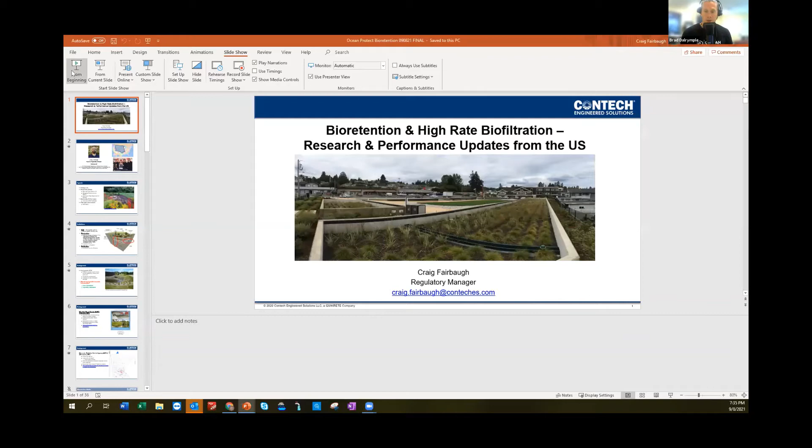And look, again, for those who aren't familiar with Craig, Craig's from Contech Engineered Solutions, and he's based in Oregon in the USA, and he's done a lot of work in relation to bioretention systems in the States. And without further ado, Craig's going to give a presentation.

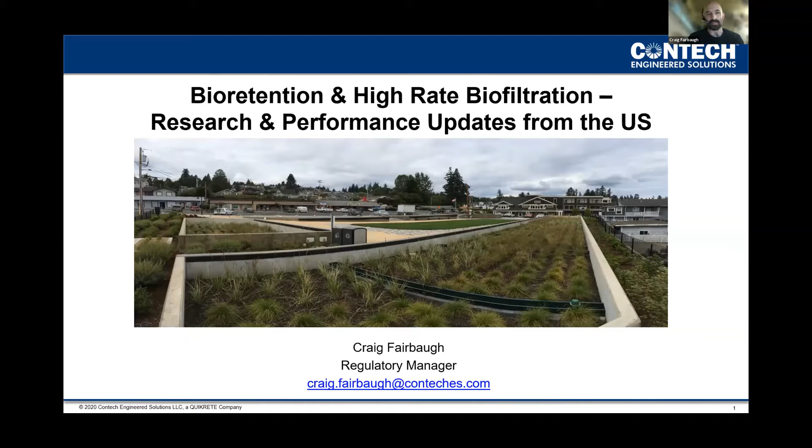And as Brad mentioned, my name is Craig Fairbaugh. I'm a regional regulatory manager for Contech. Before I was a regulatory manager, I was actually a design engineer for about 6 or 7 years, designing stormwater treatment systems in over 35 states across the United States. I've got a bachelor's in environmental engineering from Portland State, currently wrapping up a master's in environmental and water resources engineering. And surprise, my research interest is in stormwater quality, and particularly synthetic runoff and long-term performance and maintenance demands of stormwater control measures, or SUDs, as I know that you guys refer to them.

As a regulatory manager, I cover, as Brad mentioned, about 12 states in the middle of the country, primarily working with city and state agencies on stormwater manuals, updating standards. Obviously, we do manufacture stormwater treatment devices, so to make sure that those are accepted, and to walk through all the technical jargon and make sure that the highest standards for stormwater treatment are being used in those areas.

And also, as Brad let the cat out of the bag, I have been to Australia a few times in a former life. I played music for 10 years. And I just really love Australia. Been there, I think 3-4 times. It's hard to remember, but thought I'd include a shot here for fun. Actually had the chance to play the MTV Video Music Awards, I think it was, in 2008, with this band right here, Juliette and the Licks. That's me, second from the left, with a heck of a lot more hair on top of my head and a lot less hair on my face.

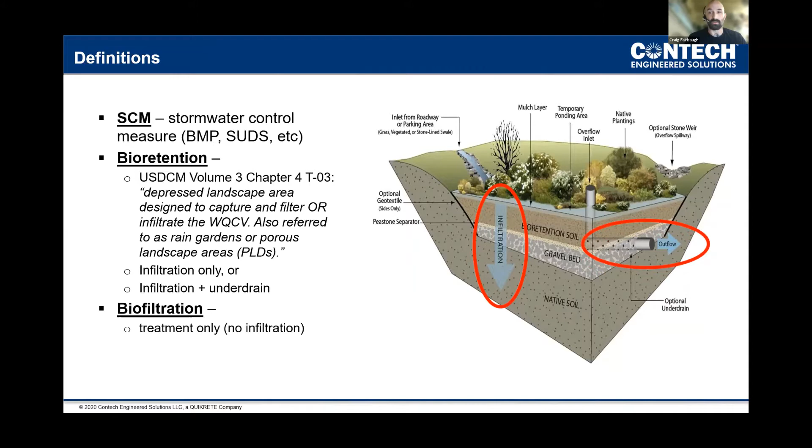And so why all this focus on bioretention? It really is the most common and popular stormwater control measure due to the many benefits achieved when it's designed properly. Pollutant removal, rate and volume control, aesthetic benefits with plants, trees, and vegetation. And it can also benefit local ecology by creating habitat for pollinators and other species, and can even mitigate the heat island effect in dense urban environments.

So it's really easy to see why bioretention is so popular. It has so many different benefits. It's difficult to wrap all those benefits into one treatment system. And they've been around for a long time, I think over 20 years at this point. However, after 20 years of implementation, we're still seeing a lot of failures of these systems in the United States.

And I don't know what the cause of this particular failure was, but there really are multiple failure modes that can occur when designing and constructing bioretention. And even just sourcing the media, storing it, blending it, there's several points of failure that can really affect your water quality outcomes. And really what an engineer has designed on paper is not always constructed to specification on the site.

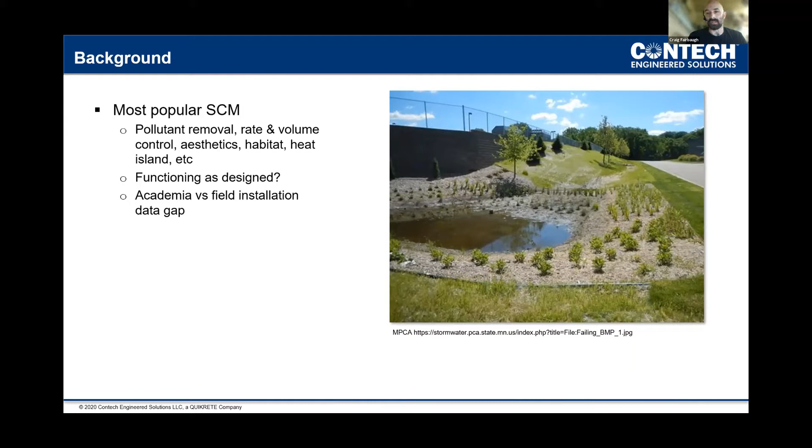So really the central theme of this presentation and from my perspective for bioretention currently is how do we best translate all the great research we have into practice? We have 20 years of research on these systems and we're still seeing so many failures. Why is this happening? And from my perspective, there's really a two-pronged solution here. First, we need to have a thorough and adequate media specification. Without the correct recipe, we're just not going to achieve our desired water quality and design outcomes. You've got to start off with the correct recipe and the correct spec. Otherwise, there's a lot of failure modes and high likelihood of not achieving water quality outcomes.

And you can't just have that recipe and that specification alone for the media and the system. There also has to be a regulatory enforcement mechanism there. If a proper specification isn't required, unfortunately, folks aren't just going to spend time and resources and money on SCMs and SuDS out of the kindness of their own hearts. I wish they would. I certainly would. If I had a ton of money, I would put treatment systems everywhere.

But there needs to be some sort of regulatory requirement and adequate oversight in the form of either a plan check review or as-built inspections. There has to be some regulatory enforcement to get these specs actually used in the field and in practice.

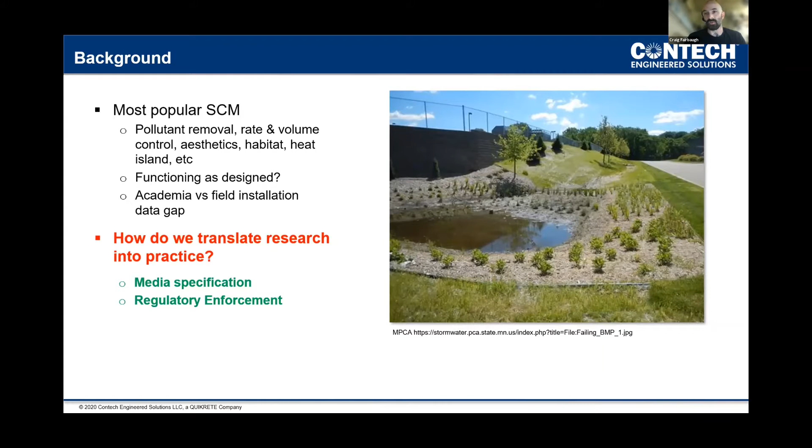So a little bit about the sources in this presentation. The Mile High Flood District in Colorado is a renowned agency in the US. The Colorado River alone is responsible for providing drinking water to 40 million people. And the district is currently updating their stormwater criteria manual. I'm a stakeholder in that group that's updating the manual. And as such, they've compiled a bioretention media literature review to kind of update their current spec.

And so a lot of the content in the next slides, I'm really just summarizing some of the content there. It's a really great lit review of all the best practices that are out there and was put together by one of the leading water resources consulting agencies in the US, Geosyntec Consultants. So big thanks to Geosyntec for the great work and lit review. I'm really, in these next slides, just a messenger here, bringing you all the highlights of all the fantastic research that was done and their lit review that they put together.

I'll also be peppering in some of the lit review with guidance from the Minnesota Pollution Control Agency. MPCA has an online stormwater manual with a similarly thorough lit review of bioretention best practices. And the manual is online, which is a really novel concept. So MPCA can update it in real time whenever new research or best practices are available. Typically, if the manual isn't online, you're waiting 4, 5, 6 years, sometimes longer, for stormwater manuals to be updated. And so a lot of the design information can really be outdated.

So can't say enough about this manual, and having it online. As soon as any new research comes out, any best practices, they can update it right away. I use it as a resource for cities and agencies I work with in the United States whenever possible. It's just a fantastic and thorough guide.

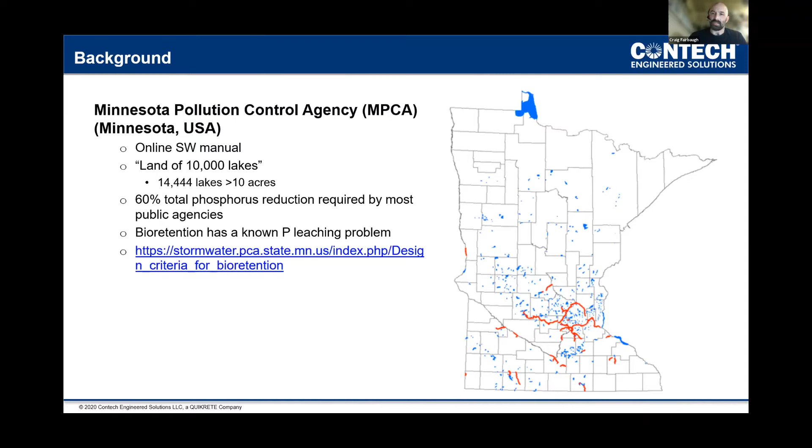And as we'll see in the slides throughout this presentation, bioretention in the United States really has a known phosphorus leaching problem. And I imagine that's a problem in most jurisdictions around the world, really, if they're all following kind of the same dated specifications. And I bring this up because Minnesota has such a keen eye on phosphorus removal. They're really looking at bioretention media closely because they want to protect their receiving waters from nutrients. And as such, most of the agencies do require 60% removal of total phosphorus, which is a pretty high bar. Washington State Department of Ecology verifies manufactured treatment systems at 50%, so this is just a little bit higher, trying to remove 60% total phosphorus on all stormwater projects.

So the Mile High Lit Review, again, will kind of serve as our guide here through bioretention media topics. First, we'll look at gradation and particle size distribution of media. We'll look at organic matter content, homogeneity of bioretention media, hydraulic conductivity. We'll look at the loading rate, which can also be seen kind of as a surrogate to pollutant loading, and designing for maintenance. And we'll briefly look at recommended bioretention media depth.

And this is really a common theme I hope that you see as we go through these slides for bioretention, where there may be an advantage to adjusting one component or one variable of the system, one ingredient of the recipe, so to speak, but there's typically an effect on all the other components and ingredients. And there can be disadvantages to other components when you optimize some parts of it. And so this is really one reason why bioretention specifications are so difficult to get right. It's just a delicate balancing act of ingredients.

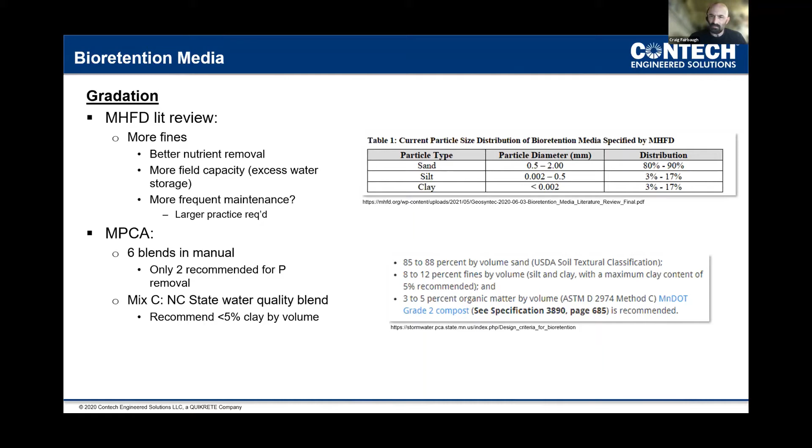Looking at organic matter, organic matter is really the critical component when we're thinking about nutrient removal and leaching potential. And a common blend used in the United States, really in a lot of jurisdictions that don't have thorough recipes for bioretention, is what's called the 60-40 blend. I don't know if you guys have something similar out there in Australia, but it's a really simple spec that's made up of 60% sand and 40% compost.

And that Minnesota Pollution Control Agency mix that they recommend if you do have phosphorus sensitive waters, mix C, recommends that to control nutrient leaching, organic matter should only be 3 to 5% by volume, which is obviously starkly different from 40% compost.

And the way that I like to explain this in presentations, the simplest way, is to think about a sponge and a tea bag. A tea bag leaches its contents downstream, whereas a sponge will retain any material trying to escape. So we definitely don't want to be tea bags with our bioretention systems, just washing out all this organic matter and nutrients downstream, which can be a big problem and has been a problem here in the United States.

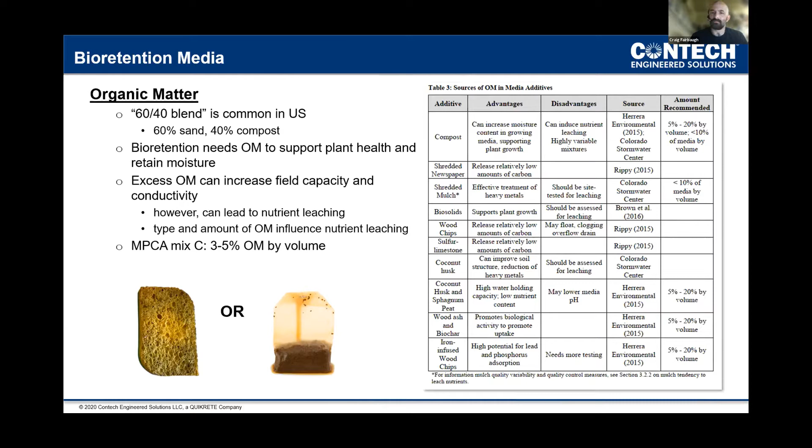The literature review research demonstrated layering different gradations can be beneficial to performance with specific respect to nutrient leaching. I hope you guys are seeing the pattern here, how much of a problem nutrient leaching is for bioretention media. The research has shown that layering a high conductivity media over a low conductivity media can help retain any leaching nutrients from organic matter.

Nutrients typically leach in the dissolved phase and require more contact time to sorb to active sites in the media. So research in the lit review has shown that choking off flow in a lower conductivity media at the bottom of bioretention is really effective in removing total phosphorus.

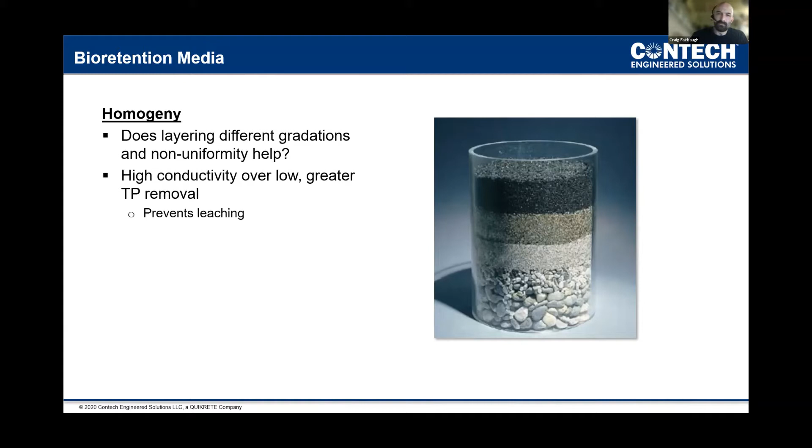Looking at hydraulic conductivity of media, this is arguably, from my perspective as a designer, one of the most important aspects of media specification. It's often used to size a practice. And it's not only the rate at which runoff can pass through the media, but also the rate at which pollutant removal has been demonstrated in research. So very important metric here.

In the US for public domain conventional systems, this is typically on the order of about 1 to 12 inches per hour, or approximately 25 to 300 millimeters per hour in metric units. And the lit review from Mile High Flood District notes that a media specification alone can't really determine the conductivity.

This really gets to the point that conductivity in real world storm events really fluctuates and is dynamic. There isn't just one conductivity that occurs through media. You have things like vegetation root growth affecting conductivity as the roots are growing and decaying. The media can be compacted during installation.

That can significantly affect conductivity, sometimes in a negative fashion. The system can also be partially clogged, which has reduced conductivity. It can be undersized. There's just really a lot of variables that can affect your hydraulic conductivity.

And research, no surprise here, the literature review showed an over 3.6 time decrease in conductivity over 1.5 years of the system being in the ground, which is really to be expected. And most jurisdictions do have safety factors to account for those decreases in conductivity. And this research in particular suggested applying a safety factor of 3 to 4 on the hydraulic conductivity to account for eventual clogging over time, which really results in a much larger footprint of the bioretention practice if you want to make sure that you're hitting your design hydraulic conductivity.

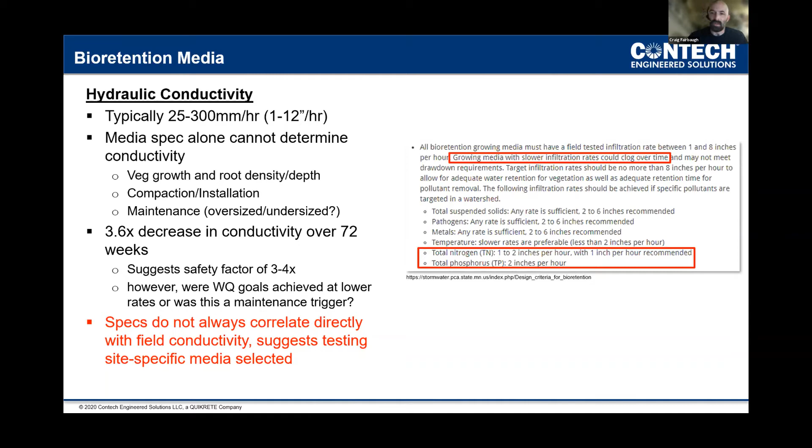And speaking again to the delicate balance of variables at play, on the right there is an excerpt from the MPCA manual, which suggests different conductivities required to remove different pollutants of concern. And note that the MPCA and research suggests media must flow at a really low conductivity, about 1 to 2 inches per hour, or approximately 25 to 50 millimeters per hour to remove nutrients. However, it's also interesting to note at the top there, highlighted, they have some guidance that says slower infiltration rates actually could clog over time. So just once again, I can't say this enough, it's a very delicate balance to remove nutrients and have a reasonable hydraulic conductivity so the system footprint is not overwhelmingly large.

Bioretention systems and all SCMs should ideally be sized using that hydraulic conductivity or an infiltration rate. Sometimes people call them different things; hydraulic loading rate we also use. But sometimes this isn't really known, again, because it's dynamic or perhaps there just isn't a design criteria provided for that by the local agency. And so in lieu of that, design manuals will recommend sizing a practice based on the size of the contributing drainage area. And Mile High Flood District recommends that bioretention footprints must be at least 2% of the impervious drainage area, which is fairly common in the United States.

But some agencies, like the Minnesota Pollution Control Agency, recommend that the footprint must be larger, or 5 to 10% of the contributing impervious drainage area. And this is presumably to be able to meet those phosphorus goals that they have in Minnesota, but also it's just a best practice that I think people are tuning into to minimize the amount of maintenance needed and really prevent the premature failure of these systems.

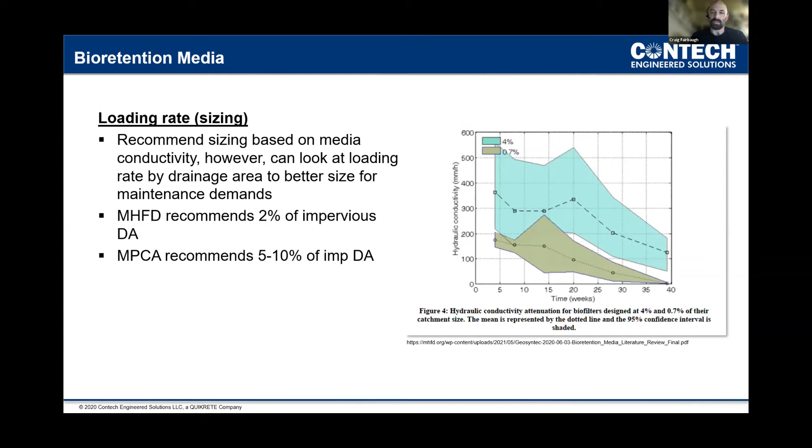And the lit review research did confirm some of this approach with field data, showing there on the right a system sized at 4% of the contributing drainage area in light blue. This had a much higher hydraulic conductivity. You see that decrease over time that we were speaking about. And then you can see the smaller size 0.7% system in green, which demonstrated a much lower conductivity.

And media depth is pretty uniform amongst most bioretention specs. It's usually around 18 to 36 inches. And the lit review did demonstrate that increased media bed depth can promote higher removal of dissolved constituents like phosphate and metals. Deeper media beds can also allow for more anoxic conditions, which can help promote removal of nitrogen and

denitrification. However, again, there's just really that delicate balance when you start to get into the world of trying to remove nitrogen in these systems and getting anoxic conditions in the very bottom. Anoxic conditions can also promote the release of captured particulate phosphorus into the dissolved phase. And so again, that nutrient leaching problem downstream. And so, it's a really delicate balance if you're trying to remove nitrogen and phosphorus in the same system.

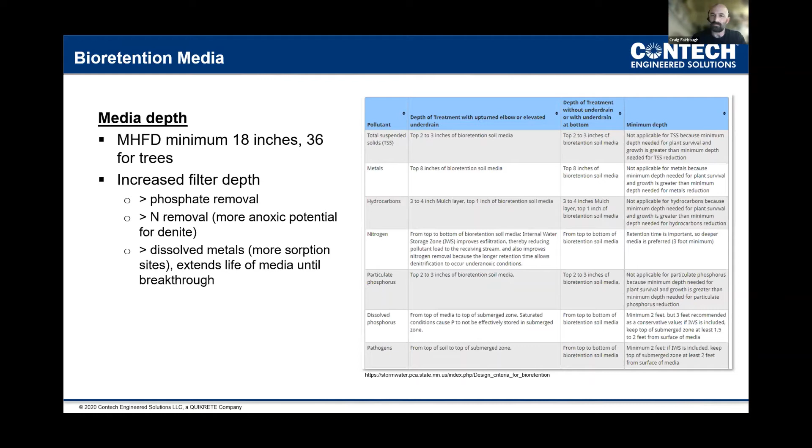Moving on from some of the media specs, the lit review did cover vegetation, and vegetation obviously plays a critical role in bioretention systems. This is pretty commonly known and well researched. And the research in the lit review demonstrated vegetation is critical to remove nitrogen and phosphate. And without vegetation, nutrients can be leached once again.

And vegetation does improve conductivity with the root growth and decay, creating macropores over time as the roots expand and die. And this phenomenon can also contribute to extending the life cycle of bioretention systems. In one research study, it showed extending the life by 3 to 6 years. And last point on vegetation, it can provide some volume reduction via plant transpiration. I don't know how significant that is compared to infiltration if you're infiltrating below the practice, but there is some volume reduction from plant transpiration.

But there's a trade-off there again. It might not be a good idea to jam pack your bioretention system with tons of vegetation. Some of the research might suggest that, hey, more plants, we're going to get better benefits. But if you're thinking, once again, about nutrients and nutrient pollution, if you have dead plant matter, maybe you have a deciduous plant in there that sheds its leaves, that can decay on top of the practice and send some nutrients downstream to pollute our receiving waters. So really, it is a delicate balancing act to get all these specifications correct.

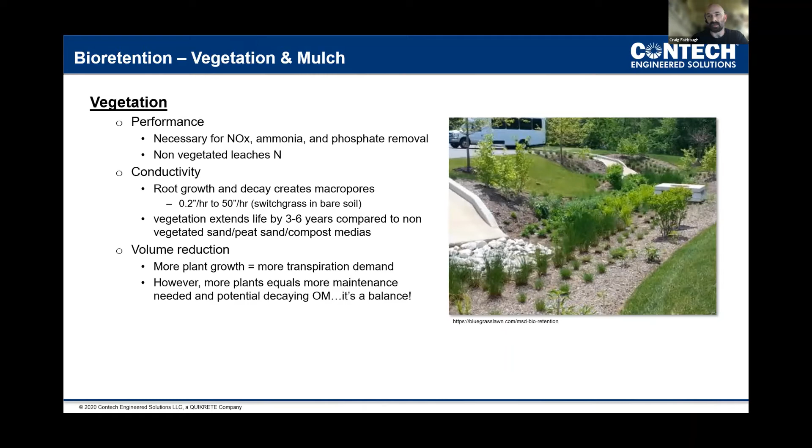And mulch is somewhat of an interesting topic. Some folks don't even use mulch in their bioretention systems. Many do. The literature review spoke to mulch removing hydrocarbons. It showed excellent removal for hydrocarbons and oils and grease. Again, nutrients popping up here again. There is the leaching potential for nutrients from the mulch even. And so the literature review recommended that your mulch, if you are using mulch on top of these practices, is free of soil, roots, plant clippings, and debris.

And some jurisdictions don't use mulch because they have floating concerns. During larger storm events and bypass, the mulch will actually float and go downstream, which is obviously not great, especially if there's pollutants that are caught in the mulch. And the literature review does discuss the benefits of different kinds of shredded mulch between single, double, or triple shredded. If you're interested in the mulch specification, I recommend taking a look at the literature review itself.

But they also do recommend some simple floatability tests for mulch if that is a concern. They recommend a really simple test that anybody can do. Put your mulch in a bucket, stir it up, let it sit for 24 hours and see if it floats. Pretty self-explanatory, easy DIY check there.

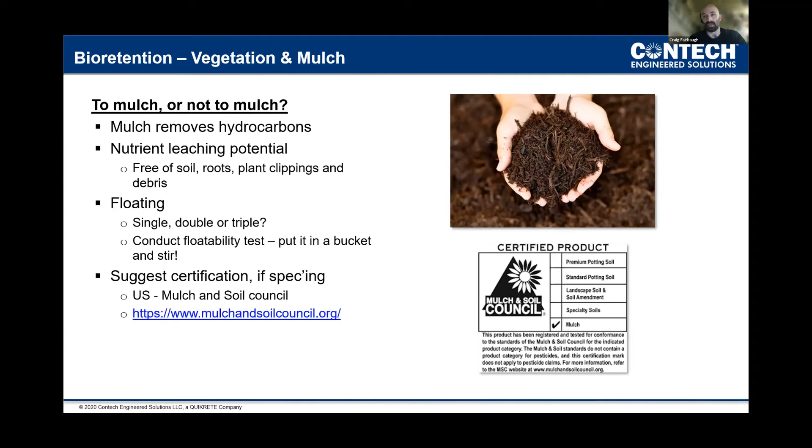But if folks are using mulch in these systems, I would strongly suggest having some sort of certification if that exists. I know that here in the States, we're fortunate enough to have the Mulch and Soil Council, which does kind of a baseline toxicity test for mulch and makes sure that everything that they supply meets that leaching and toxicity test. There's a link there if you want to learn a little bit more about the Mulch and Soil Council, but that's really helpful to at least have a baseline that the mulch has been verified.

And they've been pretty successful. There's a lot of great data on this. But again, using this in bioretention media, you've got to pay attention to that balancing act. And while it might be great for removing nutrients, if you have too much iron or alumina in the system, it can actually do too good of a job and take up too much phosphorus and not be bioavailable for the plant. And you can have plants die because of it. If you just think that, hey, iron and alumina are great for removing nutrients, let's put a ton in, it can actually kind of backfire on you and kill the plants.

And I don't know if this is a really hot topic in Australia, but I know that biochar, at least for the past 5 or so years, has been a really hot topic at conferences and amongst researchers. And there's a lot of promising research and lab scale data, even some field data out there that shows great results for biochar for multiple constituents and pollutants of interest. But the general consensus with biochar is that there needs to be more research done, especially for sourcing and pyrolyzing to spec. There just remains a lot of challenges with scaling up in the manufacturing processes before it's a viable solution.

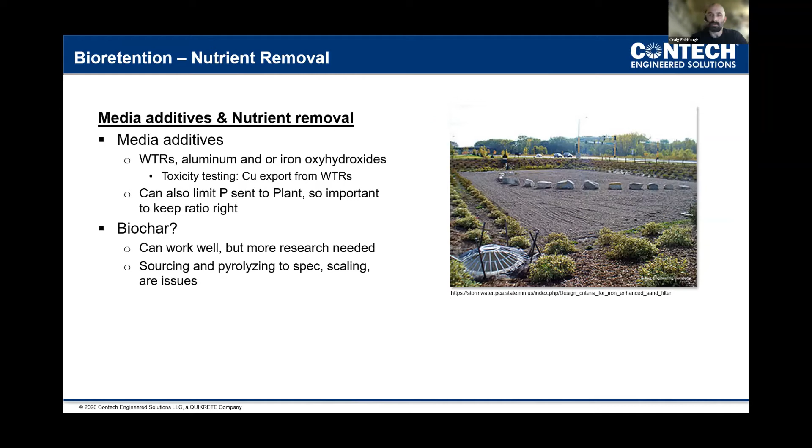Moving on from that literature review, the Washington State Department of Ecology, they're kind of in a different position here. They identified the bioretention nutrient problem all the way back in 2013. So they were really at the forefront of identifying this problem. And notably, their bioretention spec still to this day uses 40% compost, which we know leaches nutrients into receiving waters. And as a result of learning this, they studied bioretention media for 8 years to solve this problem, and recently introduced their guidance on using high-performance bioretention soil mixes this last May. So this spec actually is currently available alongside their 60/40 blend.

And I wanted to discuss this specification as it really is the best attempt yet that I've seen by a public agency to adequately address nutrient pollution by bioretention and really have a robust spec that's going to perform well over time. And the current guidance from Ecology has been to not use bioretention practices which may discharge to phosphorus-sensitive receiving waters, which at first thought makes sense. You know, this really complicated blend, it may not need to be used everywhere.

However, personally, I would really counter this notion. While some waters in the US are definitely identified from a regulatory perspective of being impaired by phosphorus, I would suggest that all receiving waters are sensitive to phosphorus. Meaning that if we keep using systems that leach nutrients and are exporting phosphorus in our downstream waters, won't we just make those waters impaired at some point? And just as engineers, personally, I feel we should be designing proactively to solve nutrient problems. Once we have things like harmful algae blooms and eutrophication in our lakes and rivers, it's extremely difficult to remove nutrients at that point, and also really costly and sometimes just flat out infeasible.

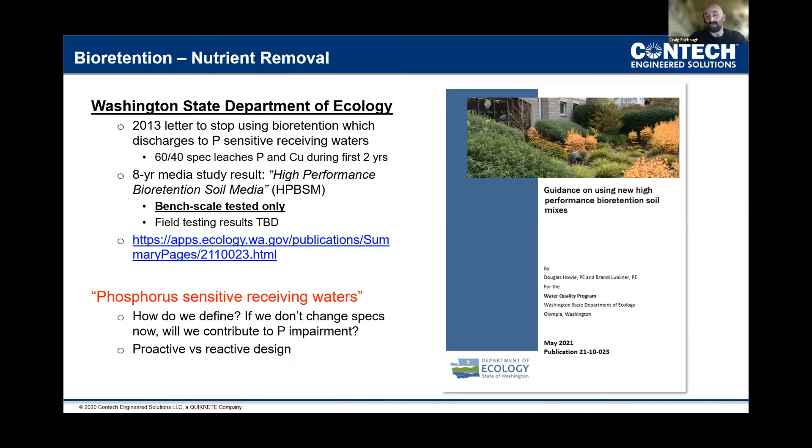And in Ecology's new blend, they recommend 3 types of high performance media blends, and each blend targets different pollutants. We're not going to go into this in a lot of detail. The link is on the slide before if you'd like to take a look. A lot of great work done by the Department of Ecology. However, really the point of showing these blends is the extensive amount of testing and quality control that must be achieved to meet this specification.

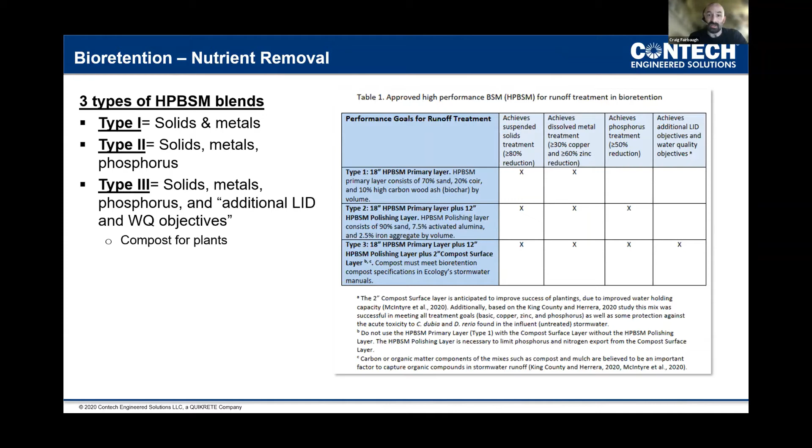And Ecology has come up with a really great recipe. It seems to address nutrient pollution pretty well. It's been tested in the lab, and there is field testing that is being done right now and should be completed soon. But we're just going to look at type 3 as this is their most robust recommendation that is designed to remove solids, dissolved metals, and phosphorus. And as they note there in that table, achieving additional LID objectives and water quality objectives.

And the type 3 blend recommends a filtration rate of about 300 millimeters per hour with 18 inches of high performance mix seen there in the tan color. And that's comprised of 70% sand, 20% coconut coir, and 10% biochar. And then followed by that 18 inches is a 12-inch polishing layer comprised of 90% sand, 7.5% alumina, and 2.5% iron. And then on top of it, to really just promote plant growth, I believe that type 3 blend has 2 inches of coarse compost on top of the media.

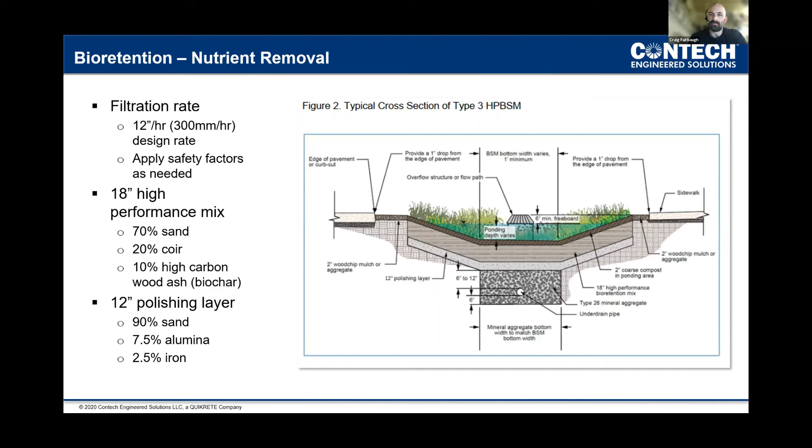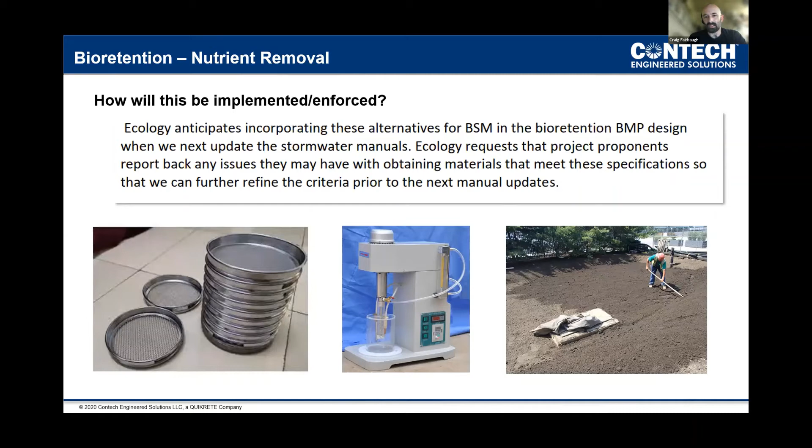And the big question my colleagues and I have about the spec is how will this actually be implemented and enforced? It's a great effort and a fantastic recipe put together by Ecology, but there's a long list of laboratory verification that must be achieved. And it could be difficult to show that all of these materials are sourced, passing all the laboratory tests and meeting the specification they're recommending.

For example, I took some excerpts out of the new guidance here, and each media component requires leachate testing for nitrate, nitrite, total and orthophosphorus, and copper. So 3 separate leachate tests, potentially 4 there. I'll be honest, I don't know if there's a separate test that needs to be run for total and orthophosphorus. I would imagine so. So there's a lot of questions here.

Similar toxicity tests that we here at Contech have run on our media can cost approximately somewhere around $700 to $1,000 per sample. So trying to meet this spec and verifying all these different components can, quite frankly, just be really costly. And secondly, we have questions about who will be checking all of this data. The manufacturers and the suppliers may test this stuff periodically. However, Ecology does suggest, and I would agree with them, that the contractor verify the specific batch meets specification. There's always that time component of when something has actually been checked for verification.

And regarding the whole process of plan check review, is the engineer or the city checking to make sure the components were tested to meet spec? Who's checking to make sure the installation is to spec? All of this verification that the materials are correct would likely require more billable hours from the engineer. It would likely require more resources from the city and the plan check reviewers. This is really complicated stuff, and understanding all of these leachate tests could result in extra training required for engineers, and for the city and the plan check reviewers to understand all the results of all this laboratory testing.

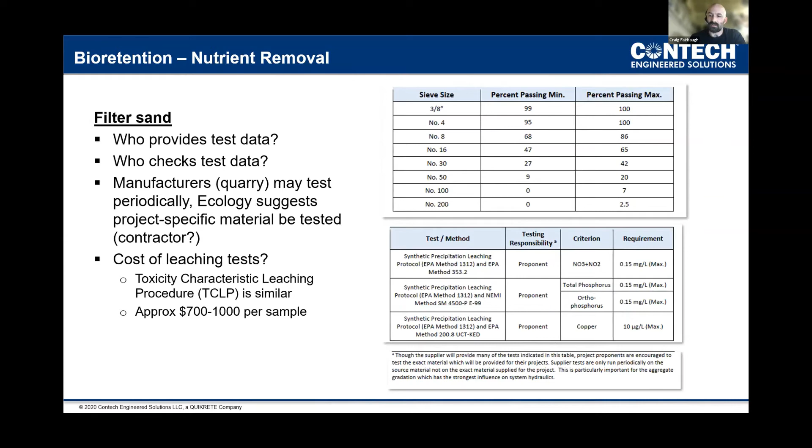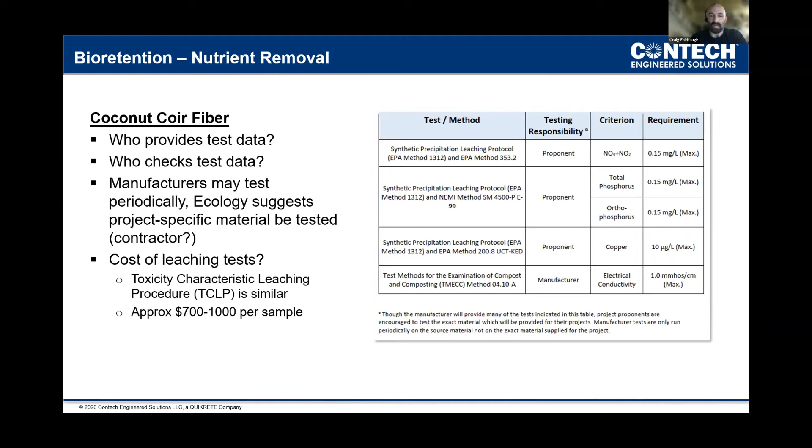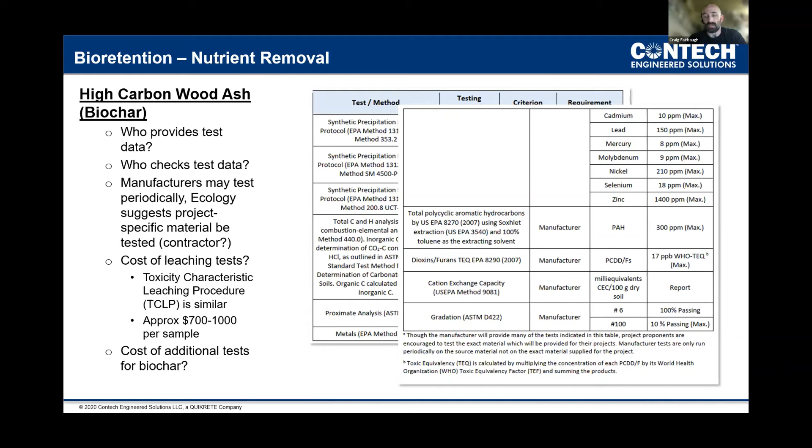And the coconut coir similarly requires leachate testing and also verification for compost methods. I'm going to fly through these pretty quickly. They're all pretty similar. The biochar has the most extensive testing required with leachate testing. They also require metals testing for arsenic, cadmium, lead, mercury, molybdenum, nickel, selenium, and zinc. They also have some leachate testing for PAHs, dioxins, furans, cation exchange capacity testing, and gradation to make sure the correct gradation is being used. It's really a doozy of lab testing requirements, a really long list.

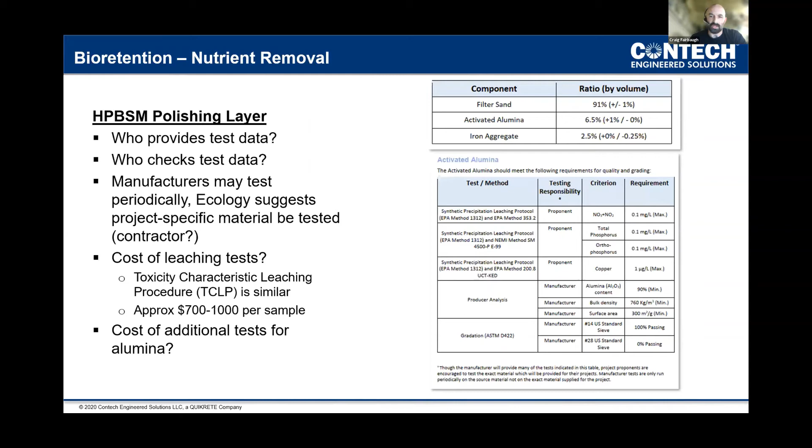And for the alumina and iron, they also have the leachate testing requirements in addition to some gradation and bulk density testing. Pretty similar between the two. And Ecology does recommend a bioretention media blending, delivery, protection, and placement plan be created and reviewed by the engineer, which is a good start. There's still some questions though. Is the city going to be checking this plan and rejecting it if it doesn't meet the spec? How will this increase billable hours for the engineer and ultimately the cost of the bioretention system? And does the city have the resources to adequately check the media specs for every single bioretention project?

This is a spec in Washington State. Just thinking about Seattle alone, that's a very large city with millions of people in the metro area. I don't know off the top of my head how many millions, but that means a lot of development and a lot of bioretention systems. This is a gargantuan effort. I applaud upping the bioretention spec to something so robust, but it's going to be interesting to see how it rolls out in future manuals and stormwater permits.

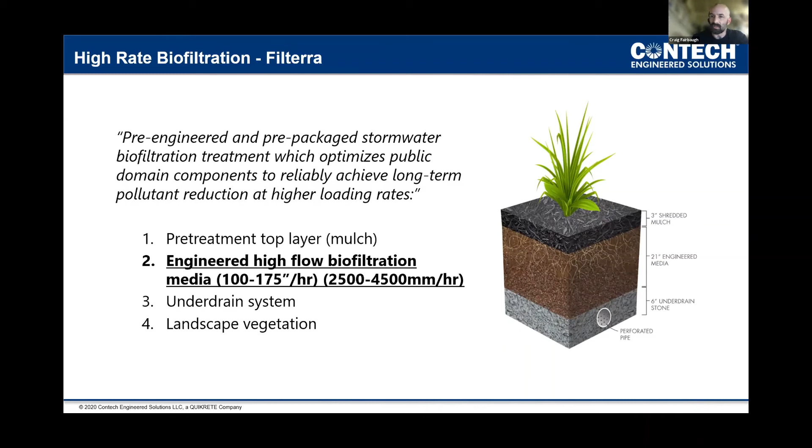And yes, I've been talking a lot about nutrient pollution, probably because I work so much with the Minnesota Pollution Control Agency, but it also just is a really big concern with bioretention in the United States. And yes, Filterra has specifically been tested and verified for total phosphorus removal through a year-long field monitoring study with the Washington State Department of Ecology.

And so moving into some of the bioretention performance updates. So I don't know if you guys are aware of this. Speaking with Brad a little bit before the call, it sounds like a lot of people may not know about this, but there is something called the International Stormwater BMP Database. I highly recommend, if you're interested in performance of stormwater control measures and SuDS, taking a look at it.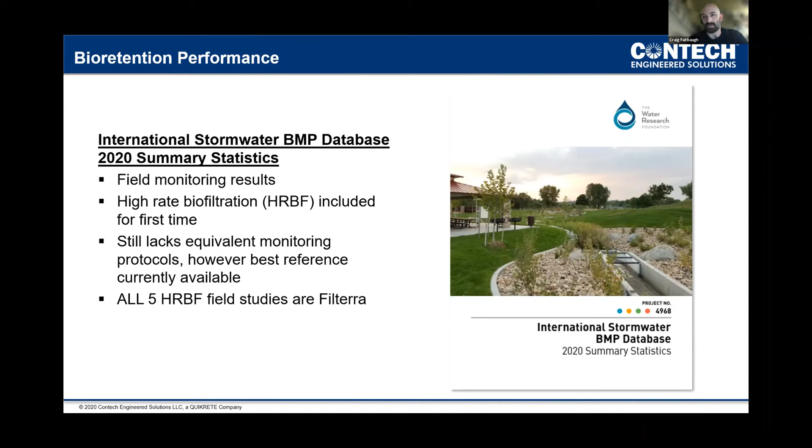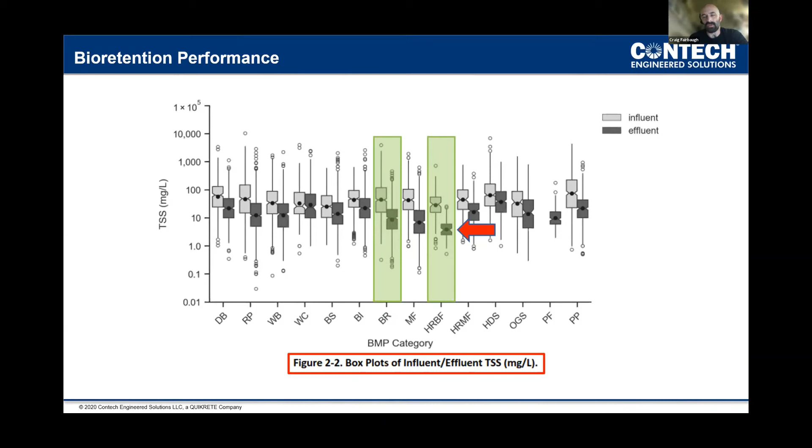And note that the influent concentration is on the left in light gray, and the effluent concentration is on the right in dark gray. And as expected, both these systems are doing a great job with total suspended solids. We know that conventional bioretention can do a good job at just removing solids.

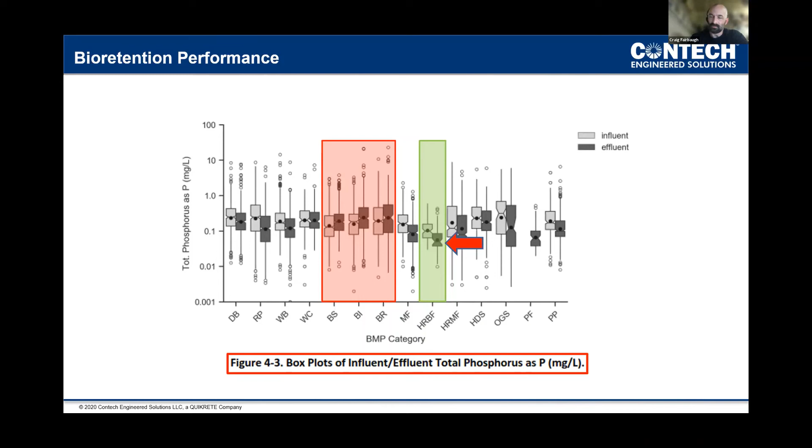So I think that's all of my content for today on bioretention media and a little bit about Filterra high rate biofiltration and some data updates. And this last chunk of content here is a plug for some of my master's research and the stuff I'm interested in.

So in addition to challenges with bioretention media specifications and nutrient pollution, there's really a gap here in the United States in testing protocols to see how long these systems perform under typical stormwater conditions. Mass capacity testing protocols exist in the United States for manufactured devices, but they often don't use all the sticky, nasty stuff like oil and organics that are found in real stormwater. So it's not really representative of field conditions and how these systems are actually performing.

And so due to COVID, I ended up actually setting up research in my garage, affectionately termed the Garagetory. I didn't think it was a great idea to be going into my university and doing research, and my bet was correct, as the university has been mostly closed due to COVID. So long story short, I've been researching and running a lot of water quality trials in my garage with all my equipment and pumps and flow meters.

And I'm testing both conventional and high rate biofilters with oil and organics to see if we can better understand long-term performance and what makes these systems clog and fail. I really wish I had a water quality lab in my garage. I do not have that. I actually do go into my office. We have a giant laboratory there where I can perform all the suspended solids samples.

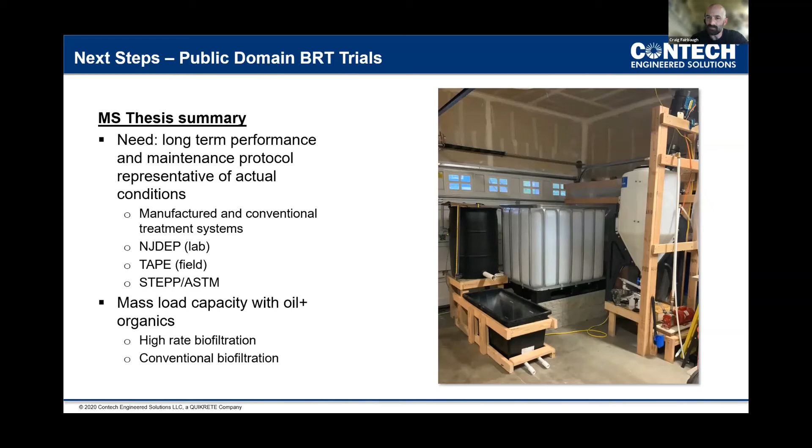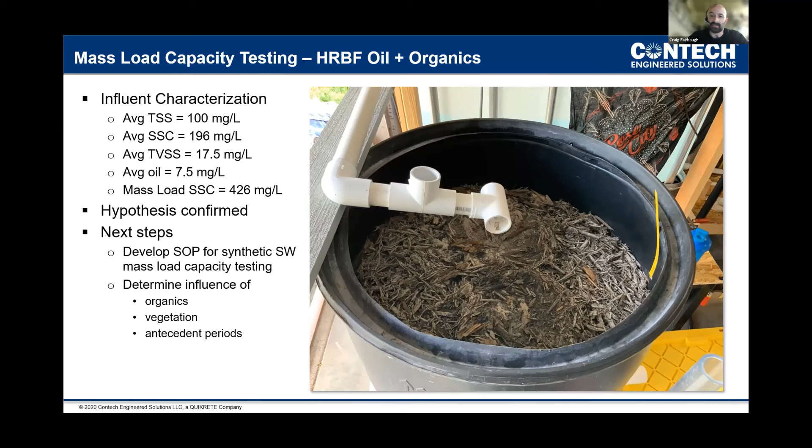And again, I'll fly through this slide as quick as I can. Protocols in the US are currently really only using inorganic sediment for mass capacity testing. So I tested it with inorganic sediment and then also with the addition of oil and organics. No surprise, the systems clog faster when you're adding oil and organics. I have about another month or so of testing, but perhaps if this is of interest to the Australian stormwater community, I'd be happy to come back and discuss my findings and see what kind of implications this has for bioretention and high rate biofiltration.

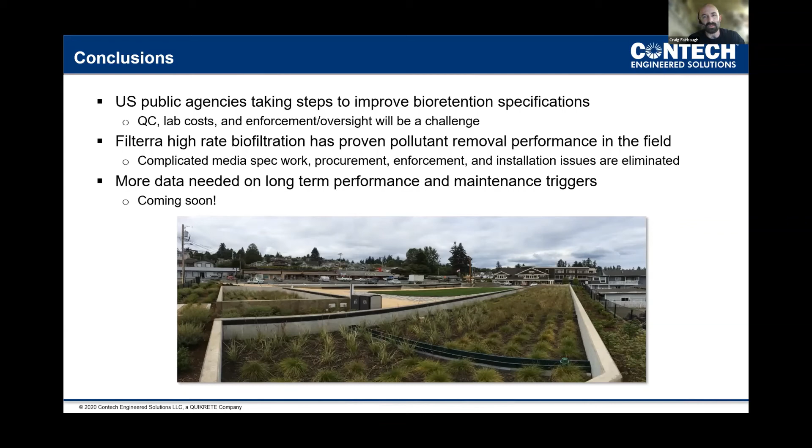And last point, more data really is needed on long-term performance and maintenance triggers. Hopefully I'll have some answers on that with my research and maybe be coming back to talk to you all about that.